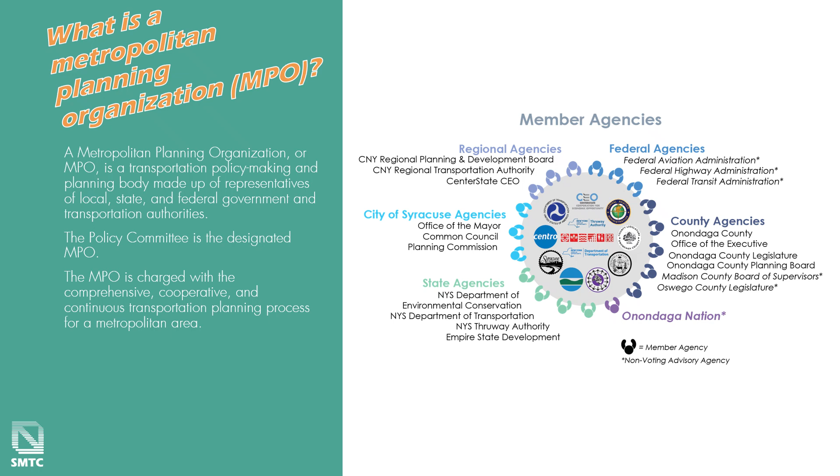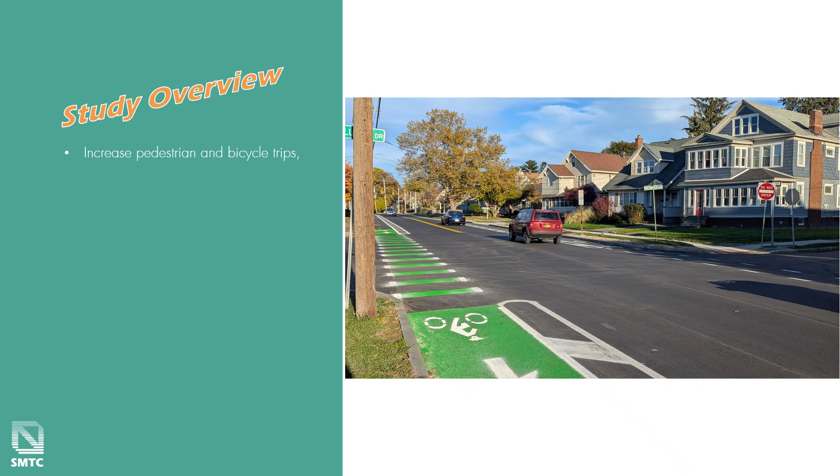The SMTC has been asked by the City of Syracuse to evaluate issues and identify opportunities to help increase pedestrian and bicycle trips, reduce vehicle miles traveled and personal vehicle trips, improve pedestrian and bicycle safety along the corridor, improve accessibility and mobility for all road users, and preserve existing infrastructure by focusing investment in areas already served by significant infrastructure investments, with the overall aim of improving connectivity across municipal lines.

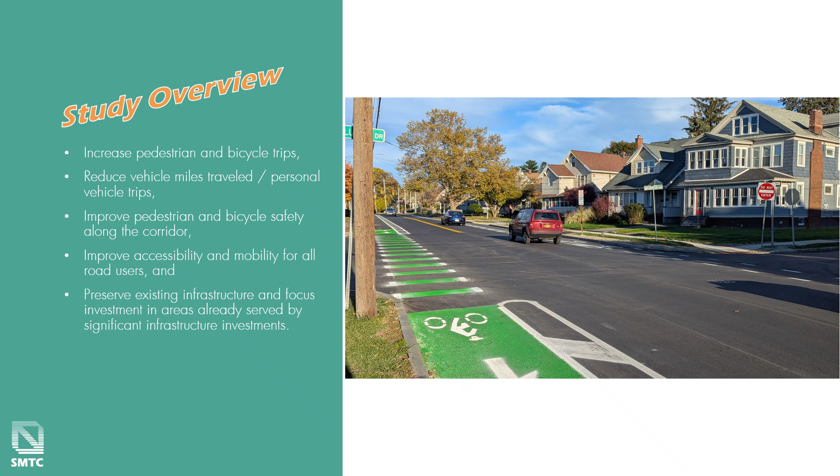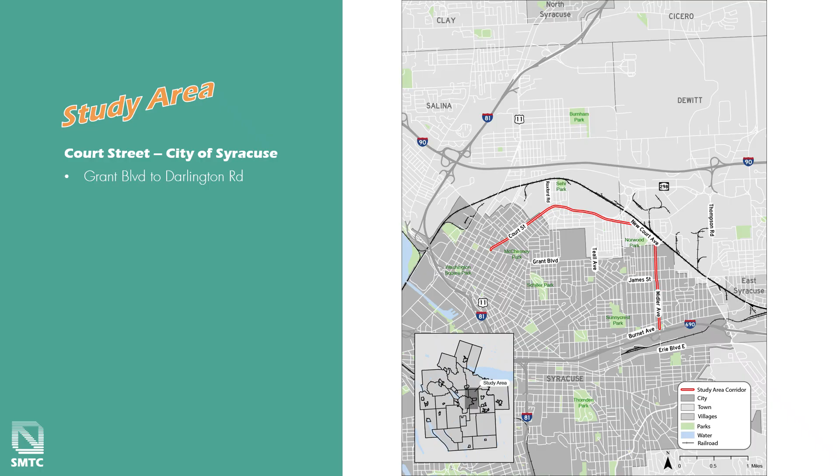The study is focused along the Court Street, Court Ave, and Midler Ave corridor, from Court Street in the City of Syracuse, Court Street in the town of Salina, Court Ave in the town of DeWitt, and Midler Ave in the city of Syracuse.

In the fall of 2025, a public survey was announced and received over 230 responses. Respondents were asked to rate their level of comfort for each section of the study corridor when driving, and when walking or riding a bike. Driver comfort always rated significantly higher than the comfort of people walking and biking.

Vehicle speeds was the top issue highlighted along the corridor for all road users, with an emphasis around Lyncourt School. Driver inattention, especially around intersections, was a common complaint. There is frustration and confusion around the changing street design. During the survey period, new striping was being installed along Court Street in the city of Syracuse. Overall, many respondents felt that the corridor as a whole is very car-centric, making it an unpleasant place to be outside of a vehicle.

Survey respondents were asked to rank from 1 to 10 different improvements that may be considered as part of this effort. Pedestrian-focused improvements were ranked the highest, with an emphasis on improved lighting and crossings. Dedicated cycling infrastructure was more polarizing, with supporters believing its inclusion is key to creating a safer corridor for all road users, while opponents voiced frustration over confusing striping, narrowed lanes, and impeded movements.

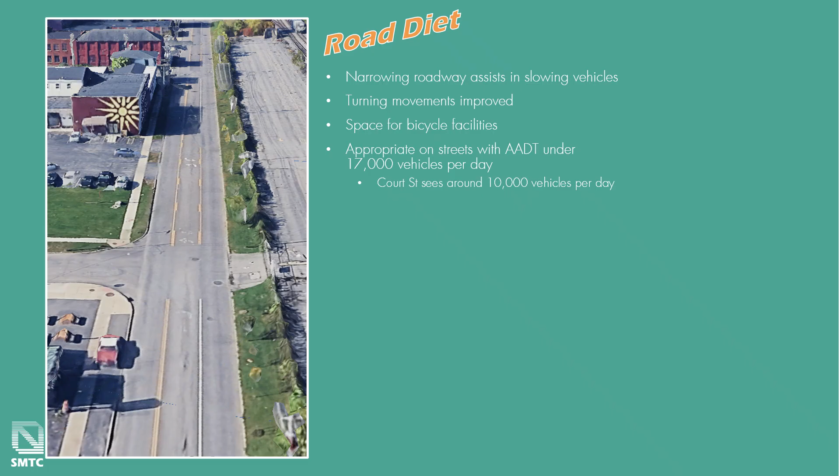Road diets reduce the number of travel lanes while improving turning movements. A common road diet changes a 4-lane roadway into 2 travel lanes with a center turn lane.

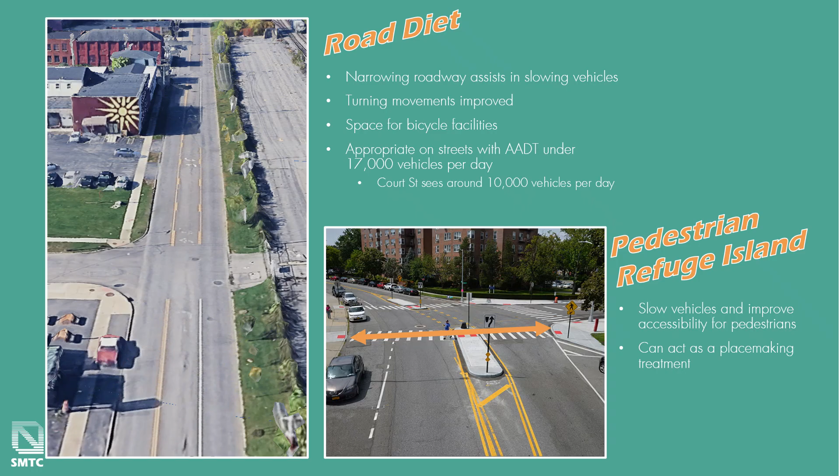Pedestrian refuge islands help to narrow the roadway, reducing crossing distance for pedestrians. They act as a pinch point, promoting slower vehicle speeds.

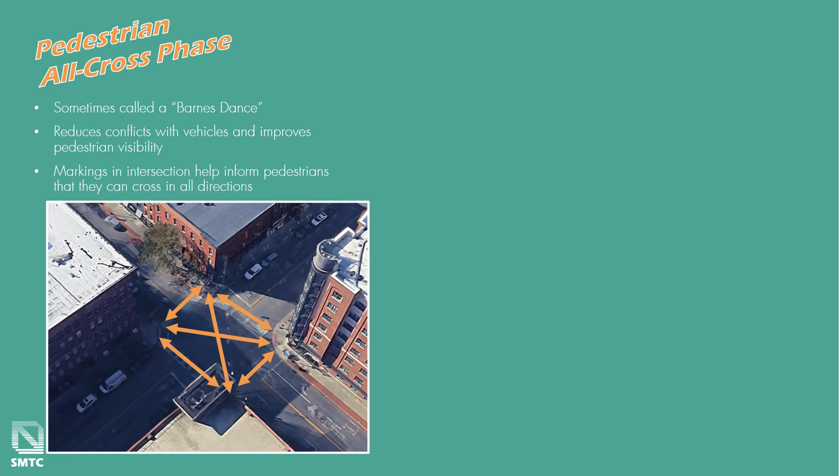Pedestrian all-cross phases, sometimes called a Barnes Dance, allow people walking to cross in all directions without any vehicle movements. This helps to reduce conflicts and improve visibility for people walking.

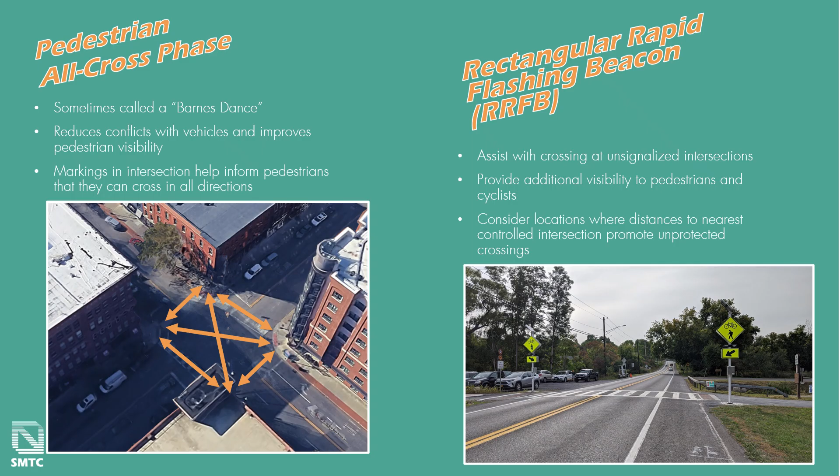Rectangular rapid flashing beacons, or RRFBs, help improve visibility for people crossing at unsignalized intersections. When flashing, vehicles must yield to anyone in the crosswalk.

Off-street bike facilities, including directional lanes and shared use paths, improve safety for people riding bikes, especially in areas where space between the curbs is tight. Two-way cycle tracks create predictable travel lanes for people riding bikes while providing space to ride further away from traffic when necessary. The wider lanes also make snow clearing in the winter an easier task as plows are able to fit.

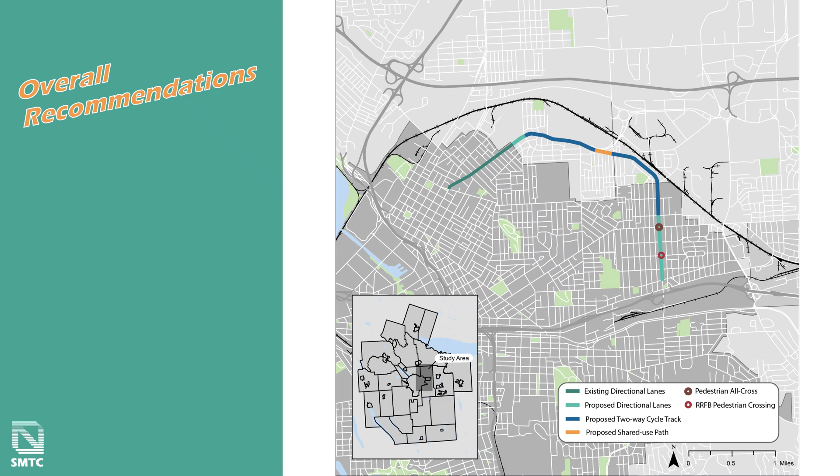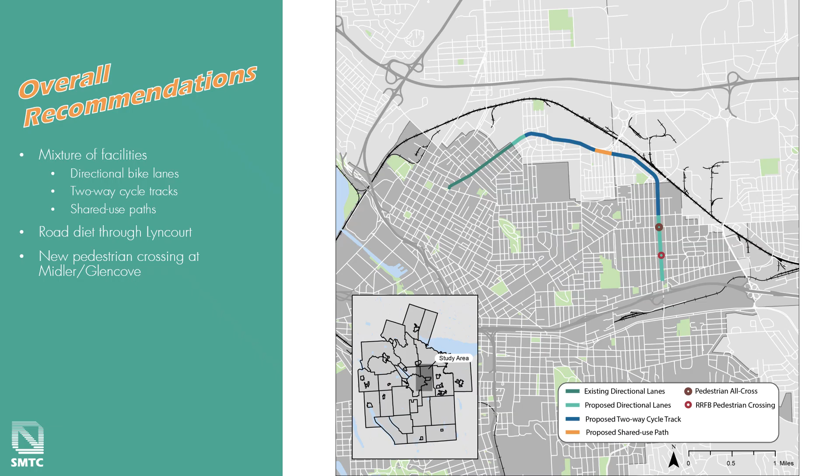Looking at the study corridor as a whole, we must consider a mixture of facilities to fit the needs of each segment, including directional bike lanes, two-way cycle tracks, and shared use paths. We are also considering a road diet through Lyncourt to right-size the street to its current needs. Additionally, pedestrian improvements along Midler Ave and the potential use of an all-cross pedestrian phase at the James-Midler intersection.

Let's look at some key intersections along the corridor to see how this all fits together.

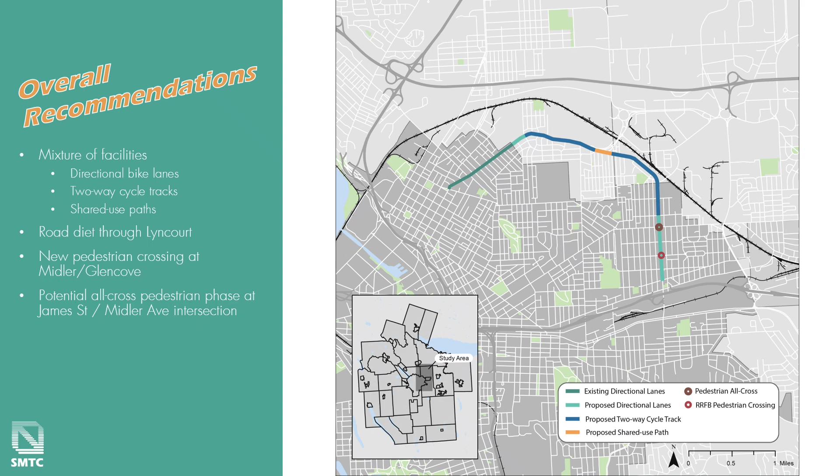The Court Street Roxford Road intersection connects a small business corridor with a residential neighborhood. To accommodate new bicycle infrastructure, travel lanes are reduced from 3 to 2 west of Roxford Road and from 4 to 3 east of Roxford Road. Directional bike lanes, similar to the ones recently installed on Court Street within the city, continue up to Roxford Road before transitioning to a two-way cycle track east of Roxford Road. The directional bike lanes help preserve and define the on-street parking lane near the commercial businesses. East of Roxford, on-street parking would be removed.

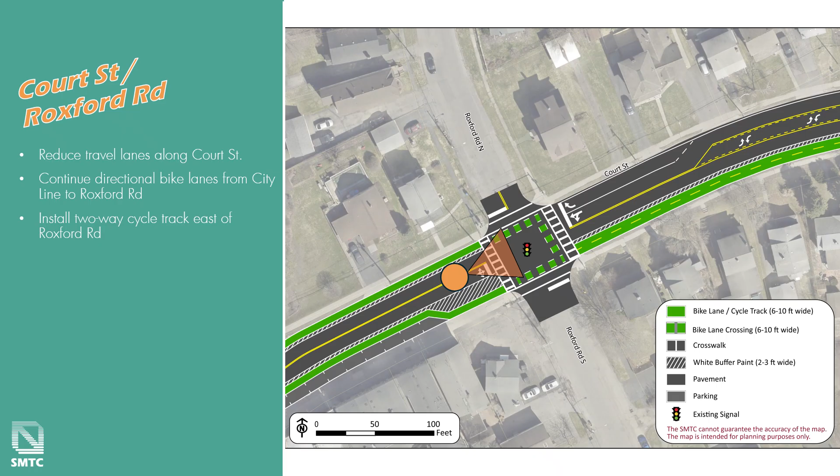Let's take a look from the street level. You can see the transition using bike crossing markings from the directional bike lanes to the two-way cycle track.

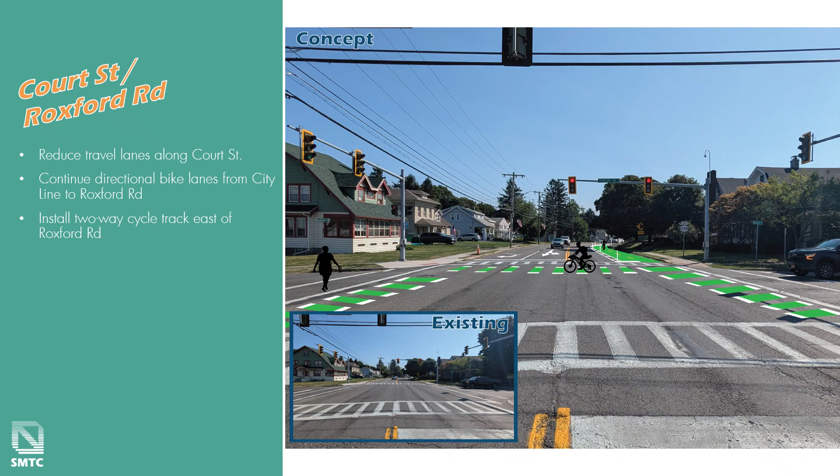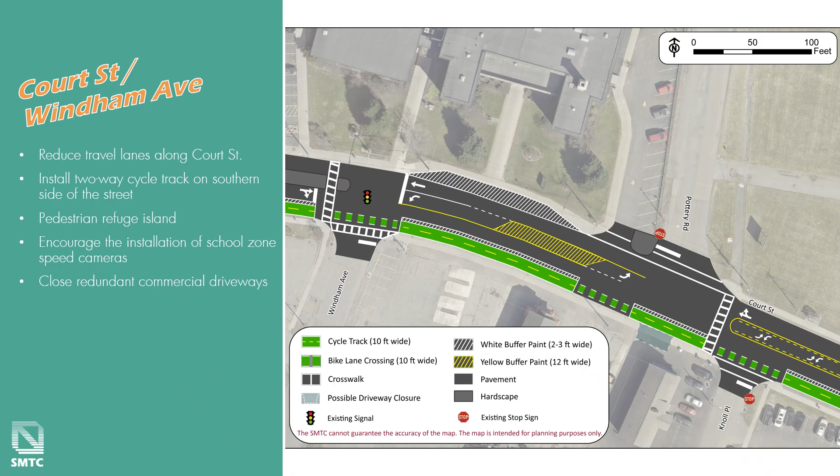Outside of Lyncourt School, survey respondents voiced concern that drivers were speeding through the school zone, creating unsafe conditions for families walking to and from school. Continuing the road diet helps remove the sense of wide open roads to speed while providing space for the two-way cycle track to continue along the corridor. A pedestrian refuge island at the Windham Ave intersection helps to further narrow the roadway while reducing crossing distances for families. Pursuing the installation of school zone speed cameras similar to those operating within the city of Syracuse would help reinforce the desired speeds. Additionally, closing redundant commercial driveways will help reduce conflicts on the sidewalk and cycle track.

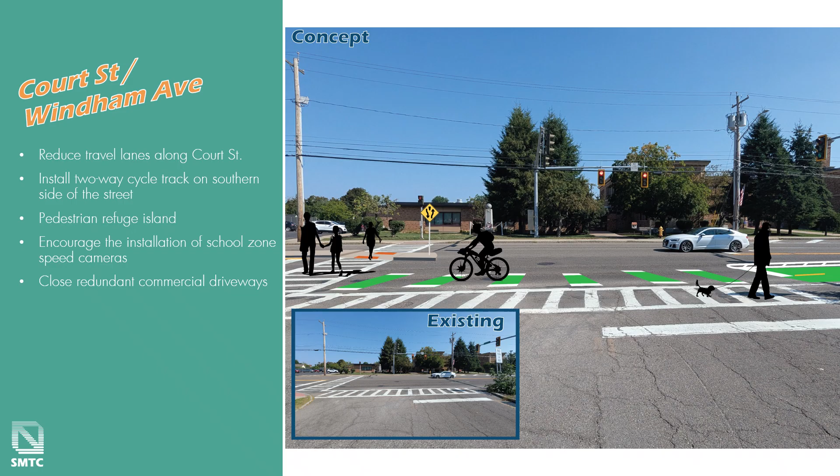Let's take a look from the street level. The pedestrian refuge island not only helps reduce speeds and crossing distances, but can also be seen as a placemaking tool to mark an important entrance into the community.

The Court Street Teall Ave intersection marks one of the first shifts in character along the corridor into a more highway-like design.

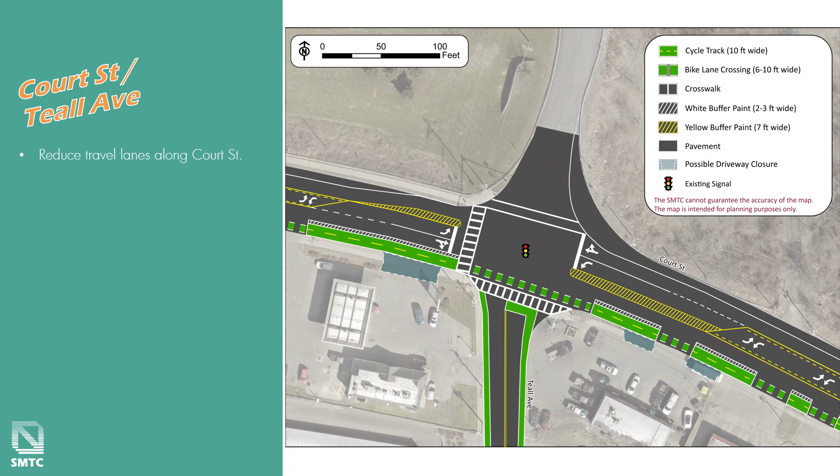Here, we continue with the road diet, including alternating turn lanes at key intersections. The two-way cycle track would continue through the intersection. Additionally, Onondaga County is proposing a bike lane along Teall Ave as part of an upcoming capital project. Adding a bike box at the intersection will help people riding bikes safely turn onto the cycle track. Narrowing or removing commercial driveways should be considered to reduce conflict points near the intersection.

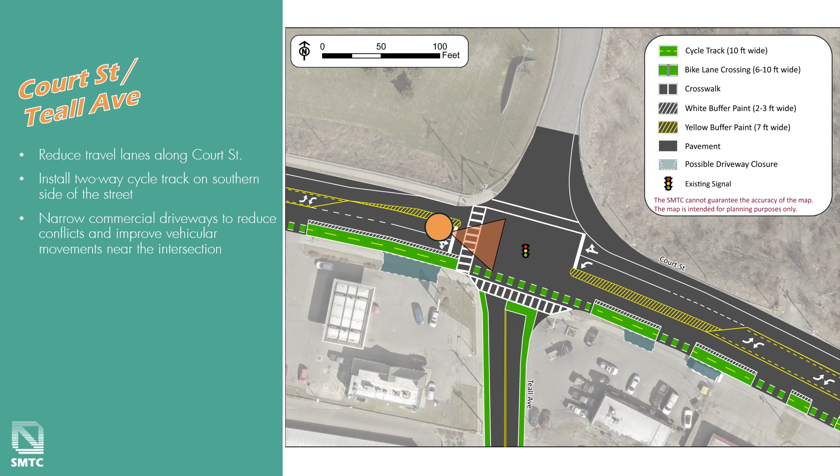Let's take a look from the street level. Traffic volumes through this intersection can easily be handled by the reduced lane capacity.

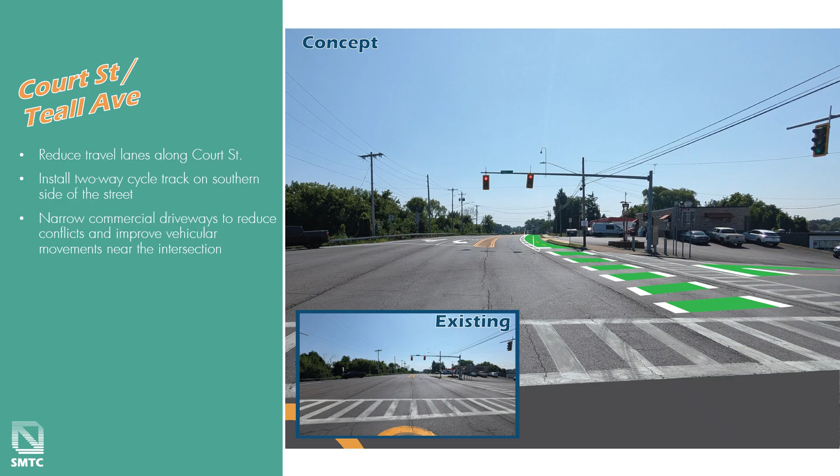Traveling east, Court Street shifts character into a more highway-like design with a wide grassy median and large travel lanes.

Reducing eastbound travel lanes from 2 to 1 west of Arterial and from 3 to 2 east of Arterial reduces capacity slightly, but still within acceptable levels of service. By reducing the travel lanes, the cycle track is able to continue along the southern edge of the street. Again, closing and narrowing commercial driveways will help reduce conflict points while creating more predictable movements by vehicles.

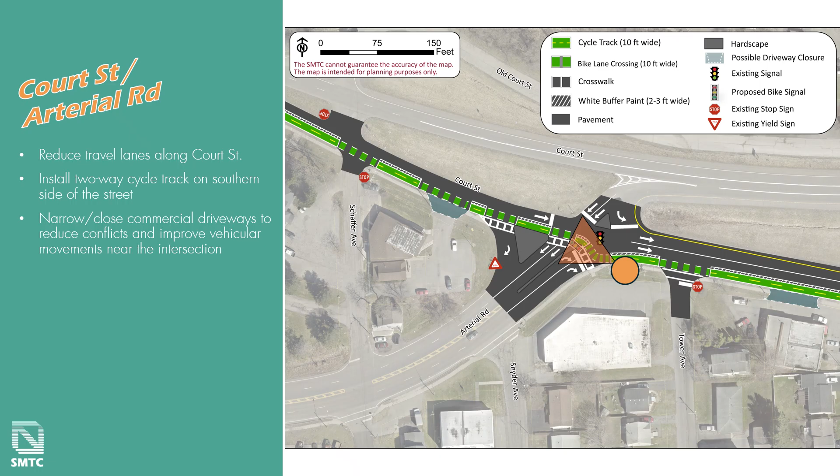Let's take a look from the street. On the one-way street, a bike signal is necessary to ensure westbound riders know when they are allowed to move through the intersection.

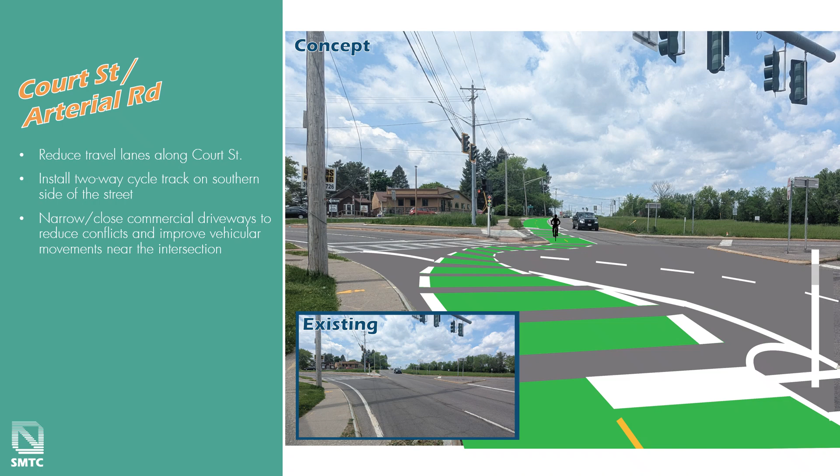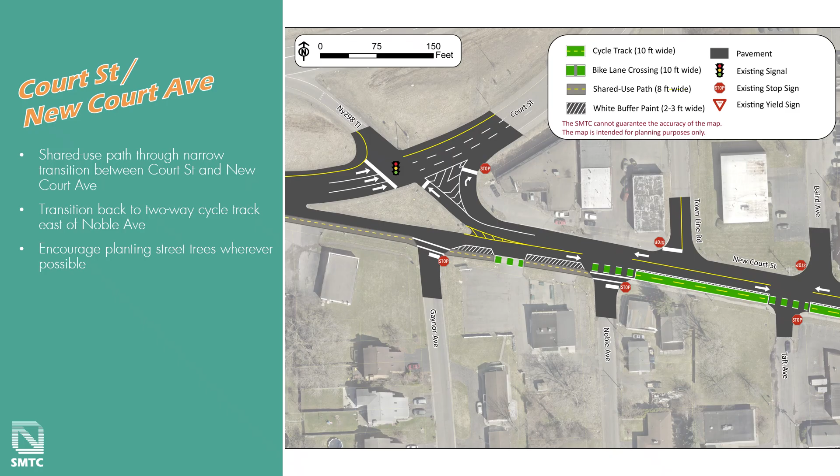The transition between Court Street and New Court Ave creates a pinch point as we continue east. Shifting the cycle track onto an expanded sidewalk to create a shared use path helps connect people walking and riding bikes through the intersection with minimal construction. East of Noble Ave, the roadway widens, allowing for people on bikes to shift back onto the road into a two-way cycle track. While New Court Ave has an existing sidewalk, the lack of tree cover can often make the sidewalk unpleasant. Encouraging the planting of street trees or trees in the front lawns of businesses, along with the installation of pedestrian scale lighting, can greatly improve the walking experience.

Let's take a look from the street level.

The expanded sidewalk would be 8 to 10 feet. While this is a tight space to share, the overall volume of people walking and biking is fairly low, so conflicts are unlikely to occur.

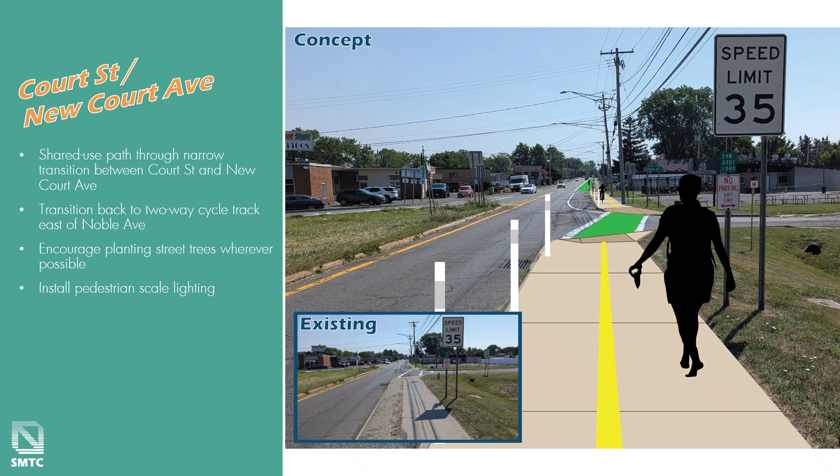As New Court Ave heads south to re-enter the city of Syracuse as North Midler Ave, the corridor transitions from a light industrial commercial area to a more residential neighborhood.

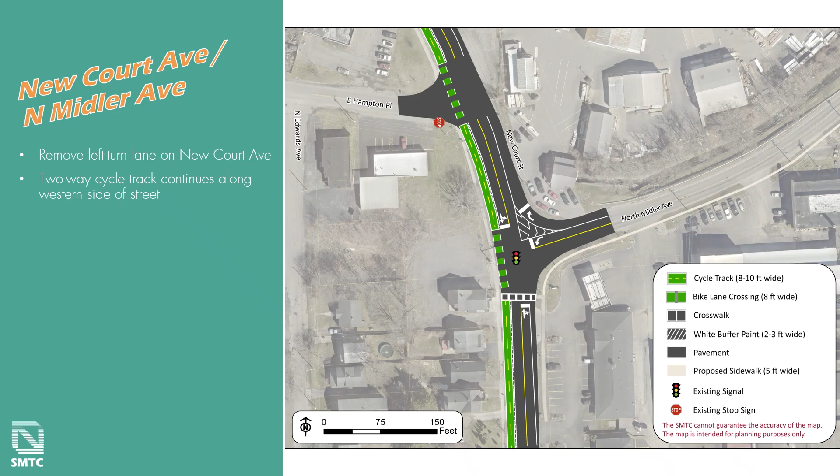To continue to fit the two-way cycle track, the southbound left turn lane would be removed. Low numbers of turning vehicles should not impact mobility through the intersection.

Survey responses and travel data indicates a need for pedestrian infrastructure along North Midler Ave as it continues east under the railroad bridge. Installing a sidewalk is crucial to improving accessibility and safety for people walking to and from the neighborhood on the other side of the bridge.

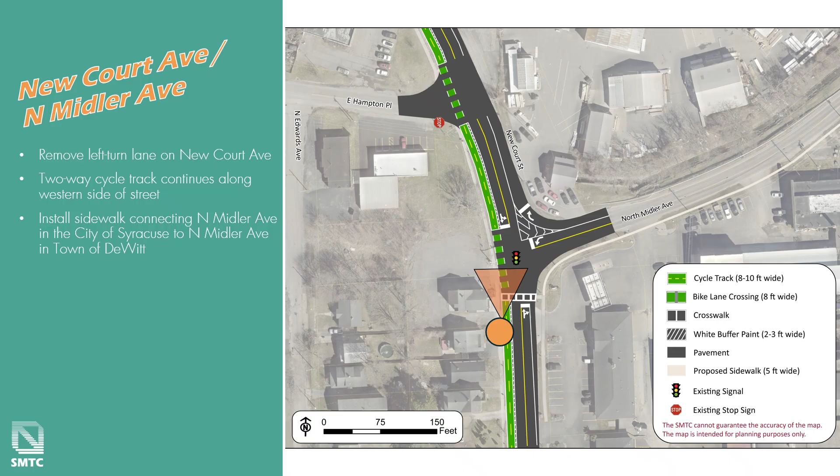Let's take a look from the street. South of the intersection, the cycle track will begin to narrow to accommodate on-street parking.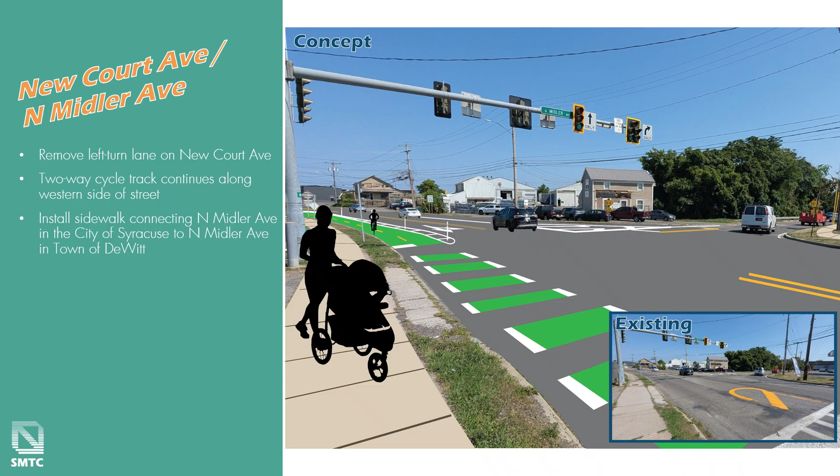Under the railroad bridge, the travel lanes will shift closer to the northern wall, providing space for a 5-foot sidewalk along the southern wall.

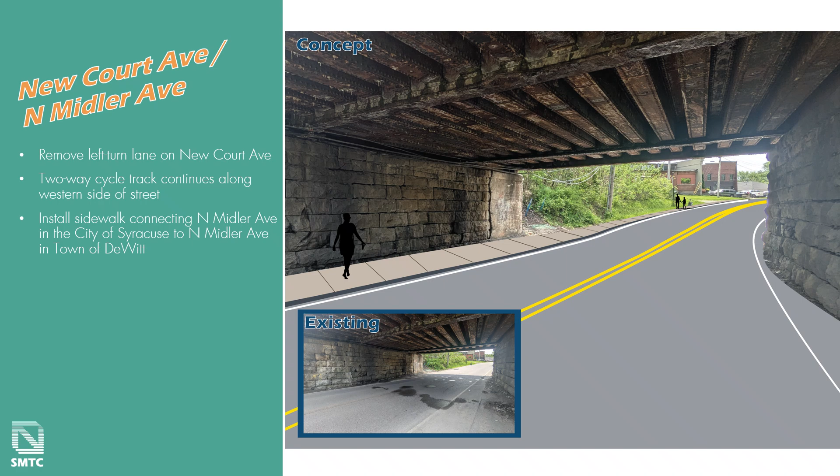A planned greenway along Tyson Place offers an opportunity to connect to the expanding bike network within the city. The two-way cycle track, narrowed to accommodate on-street parking, would end at Tyson Place, connecting to the upcoming greenway. South of Tyson Place, on-street directional bike lanes would continue towards James Street, eventually shifting onto the curb.

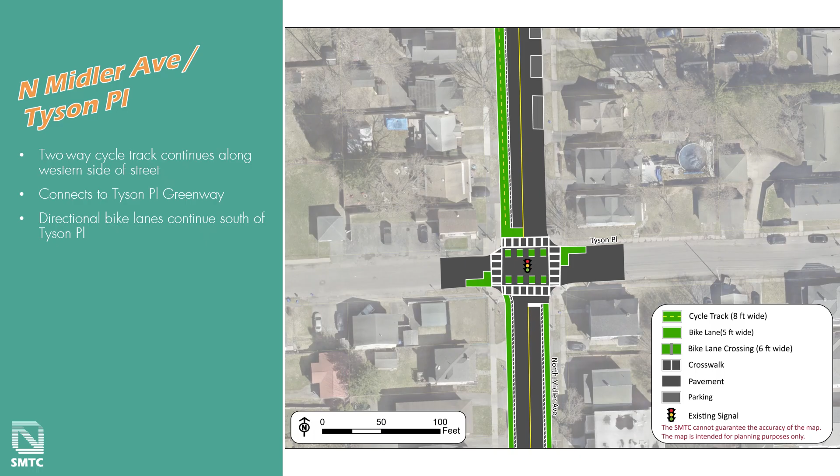Let's take a look from the street level. Bike boxes give priority to bike riders looking to turn onto the greenway network.

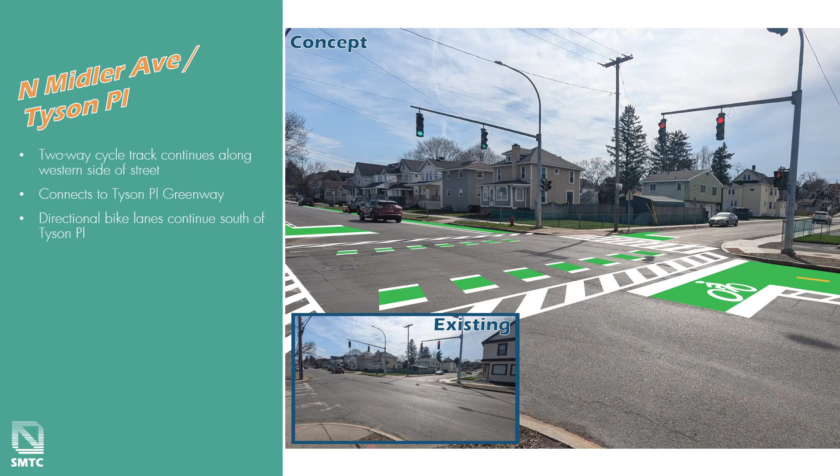The James Street Midler Ave intersection is on the city's high injury network within the Vision Zero action plan. No turn on red signage has recently been installed as a way to reduce potential conflict points.

As the intersection is already tight on space as it tries to accommodate several important turning movements, shifting bike facilities onto the curb provides the safest approach.

These paths include directional shared use lanes as well as a dedicated directional lane where space is available. Extending the curb on the southeast corner helps slow turning movements and discourages using the lane as two separate lanes.

As currently happens. Additionally, utilizing a push-activated pedestrian all-cross phase would allow people to walk through the intersection without any vehicle movements, improving visibility and safety.

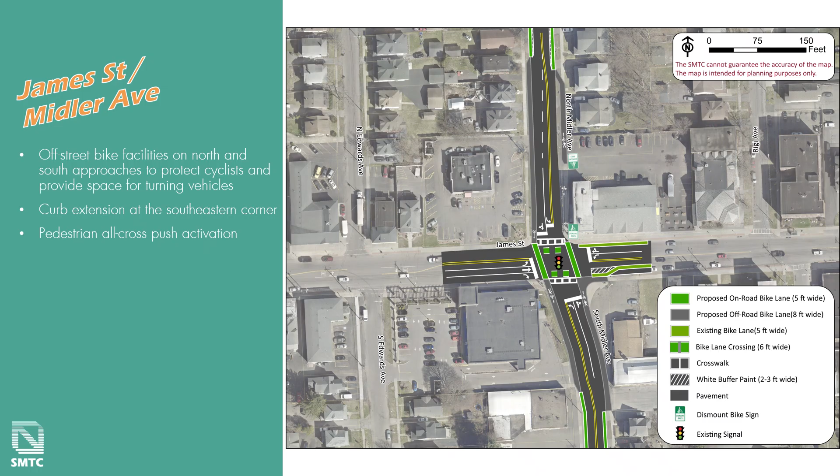Let's take a look from the street. People on bikes traveling north will need to dismount briefly near the northeast corner, as existing utilities create a tight space that's unsafe for both people walking and biking to use at the same time.

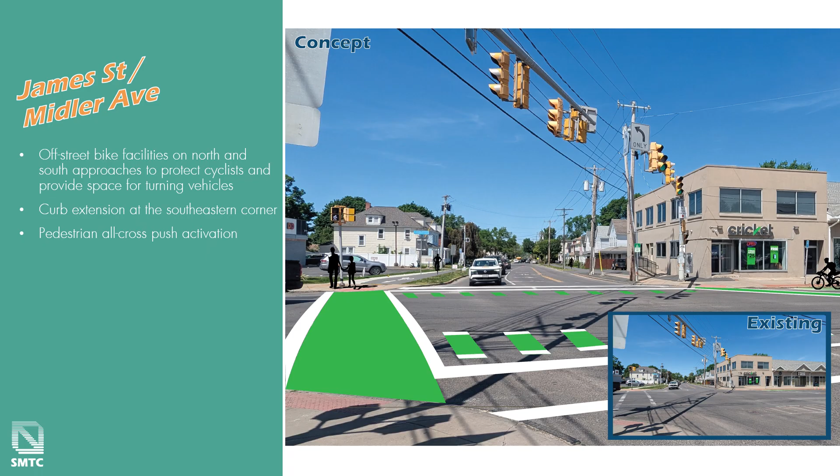South of James Street, people must travel half a mile to Sunnycrest Road in order to cross Midler Ave on foot.

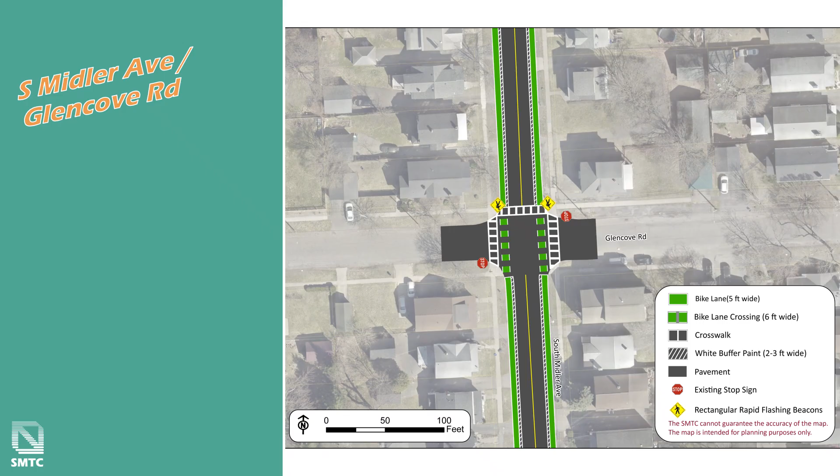To address this lack of connectivity, an unsignalized pedestrian crossing with rectangular rapid flashing beacons at Glencove Road will reduce the distance significantly while providing direct access to a new bakery opening soon.

Directional bike lanes continue south along the corridor, eventually connecting in with the Caleb Ave Greenway.

Reinforcing the buffer near intersections with flex posts will help to visually narrow the roadway and promote safer turns. Additionally, the improved visibility will ensure all intersection movements are safer.

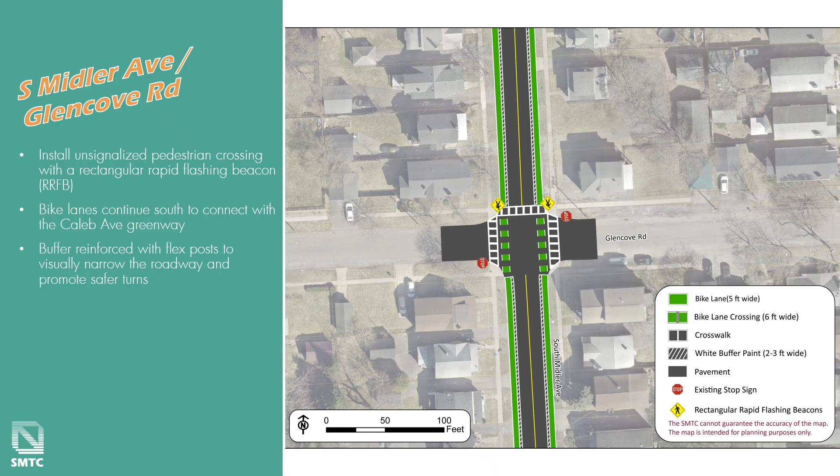Let's take a look from the street. Reinforcing the bike lanes near intersections with flex posts will also cut down on vehicles illegally parking on the bike lane and obstructing visibility for those looking to cross.